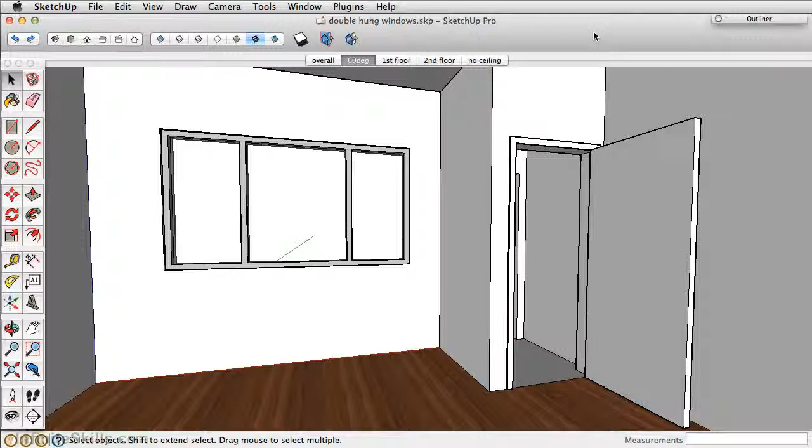Okay, let's create another window type, and that's a double hung window. Let's orbit outside and take a look at the top two windows in the master bedroom.

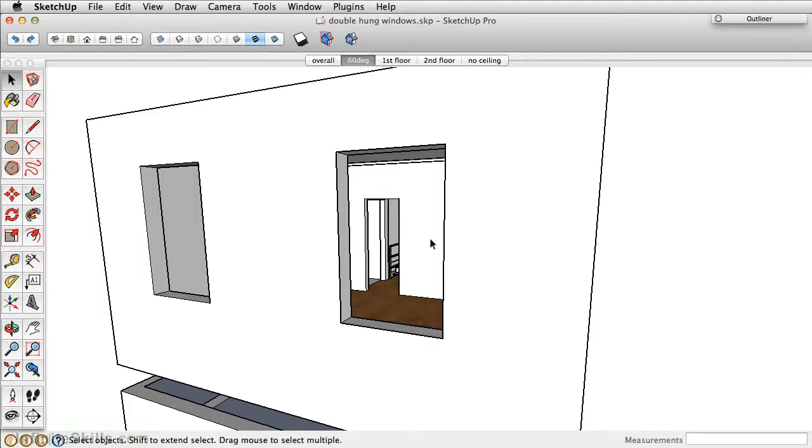To create the double hung window, we're going to draw a rectangle and then separate the rectangle in two, and then push pull the elements to create the two parts of the window that would essentially slide up and down.

Go ahead and take the rectangle tool, draw a rectangle over the front face here, and like previous ones, double click, then right click and make it a group. Let's go ahead and double click inside our group.

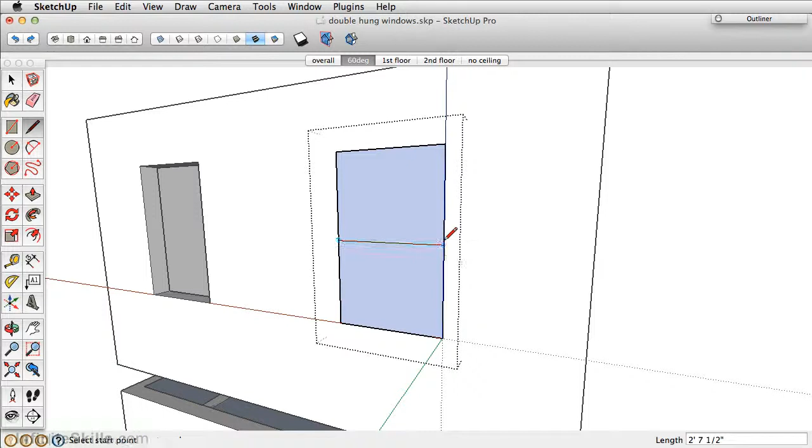Take the line tool and draw a line to break this into two separate faces. Next, offset 2 inches and double click to offset the other element 2 inches. Now before you extrude, we want to separate these into two separate pieces.

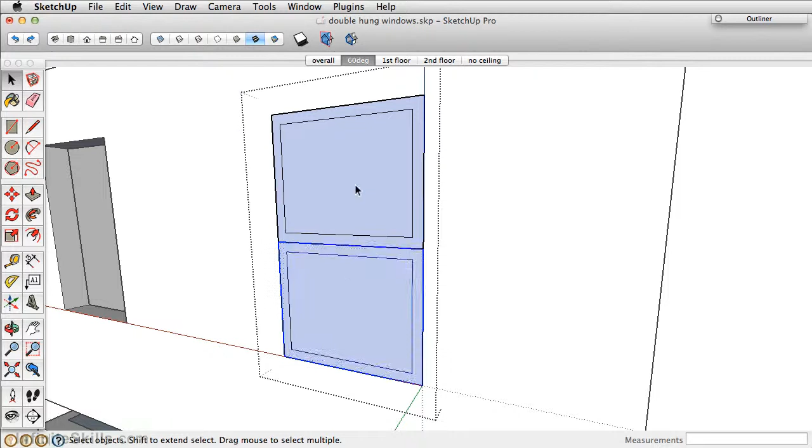So take the select tool, select the top element or the top window and group it, and then do the same with the bottom. Now take the select tool, double click inside the top one, and push pull this out 2 inches, and push pull the bottom one out 2 inches as well. Take the select tool just to click outside of that.

We now want to move the bottom window in front of the top window. Select both of them and move them inside the room. So we need to move this in the green axis.

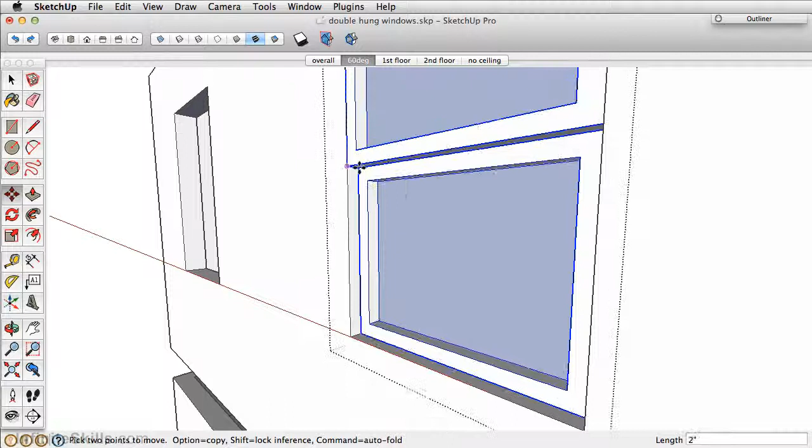So orbit inside. You can move this in a little bit further and move it in 1 more inch, that way it's an inch on this side. And it looks like it's 3 inches on that side, and an inch on the top here.

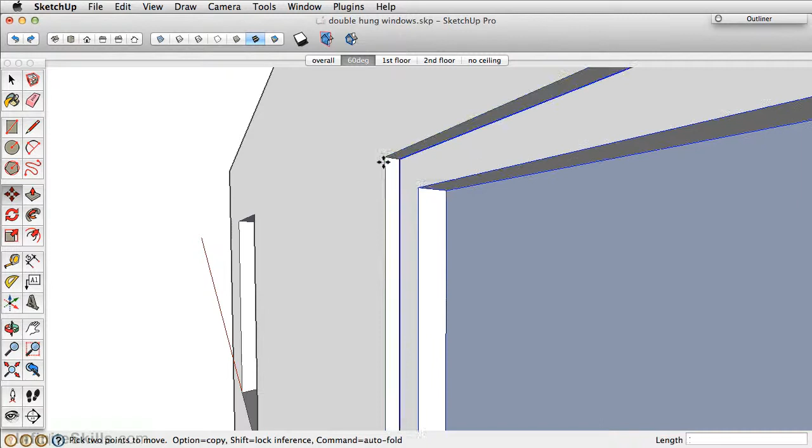All right, the next thing that we can do, double click inside our group. And let's push pull this face back, not all the way to 2 inches. We just want to push this back 1 inch, and the same for the top.

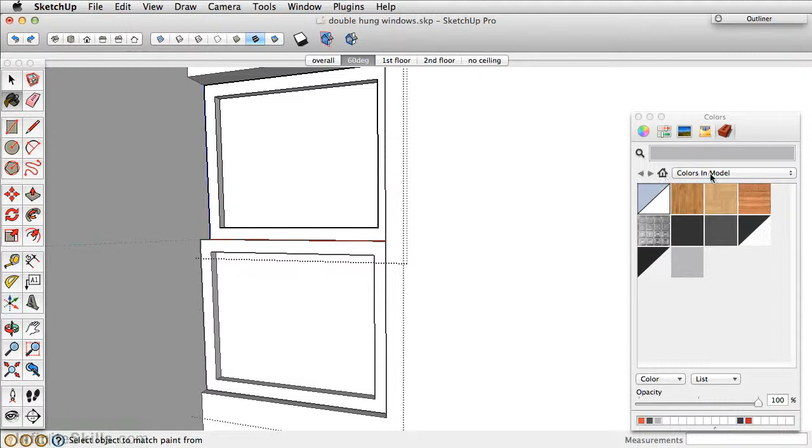Take the paint bucket, click on the brick or the materials in the model, and we want to select the translucent one that we used downstairs and apply it on both faces here. Also take the silver and apply it to both elements there as well.

Now, since this window is the same as this window, we want to right click and make this a component. And then we want to move copy it.

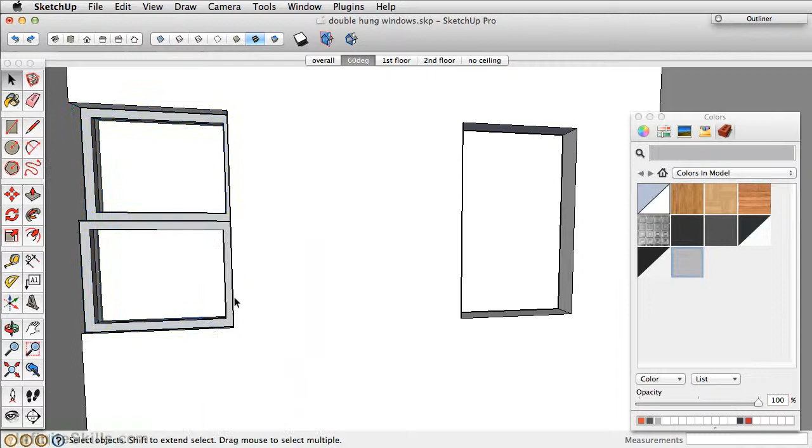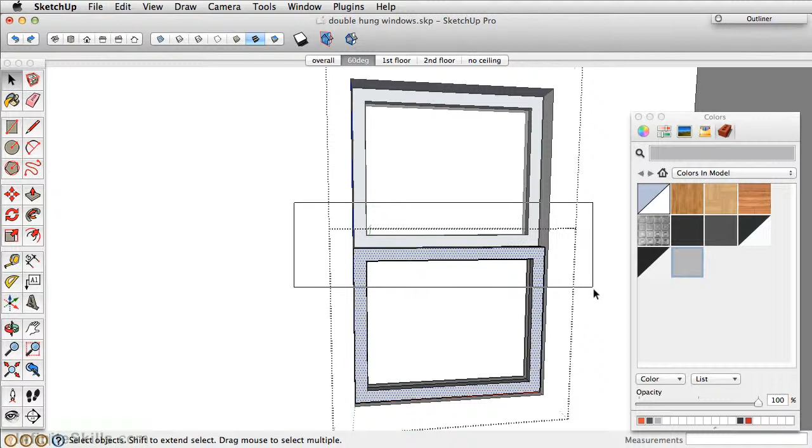The last thing that we notice is that the top face here should actually be up further. So double click again to enter this face. Select a selecting window from left to right around that top area, and that way it only selects the elements in that top area there. Take the move tool and just move this up, making sure you're in the blue axes.

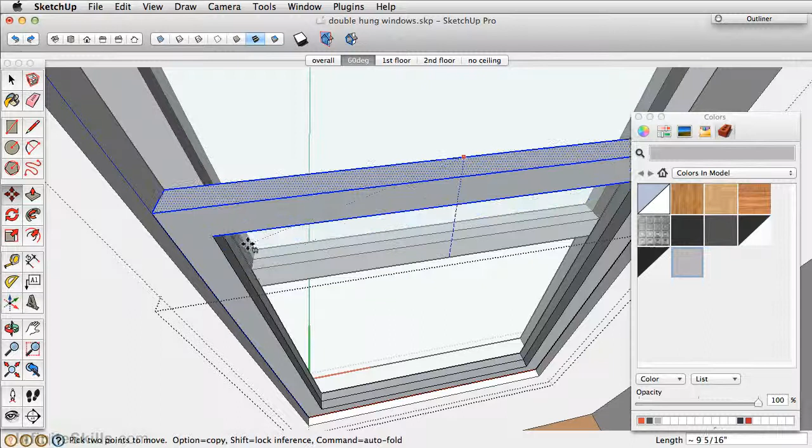Can't find the blue axes? Remember, you can press the up arrow key to lock in the blue axes. And we just want to infer it to the top point right there. If you're having a hard time finding that point, you can always click on the X-ray mode, and that'll allow you to see through the model.

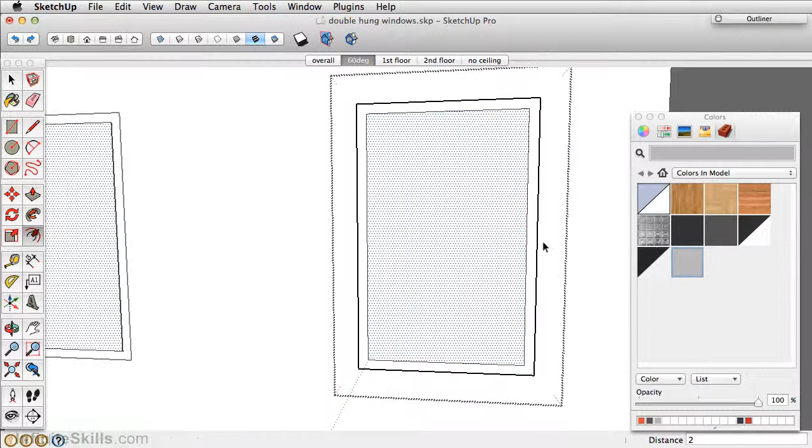If you want to add trim, you can actually draw a rectangle around that front face. Offset this 2 inches and just delete the front face and push pull your front out 1/2 inch. So now you have the trim and the window. I can click out.

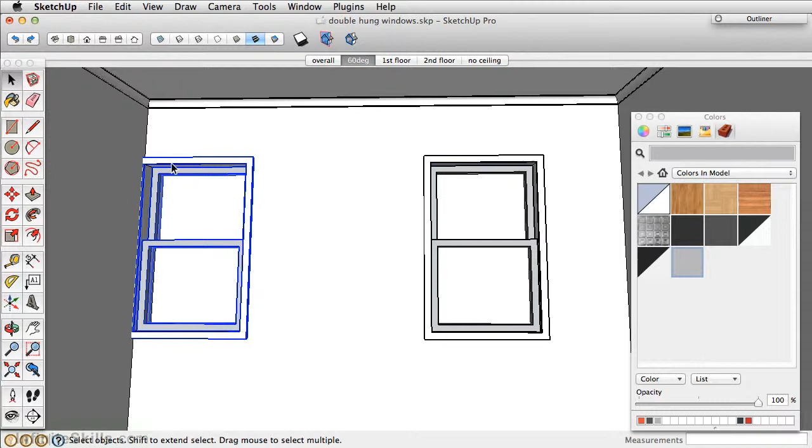In this case now, this window actually ends right up against the wall here. So we can make this unique by right clicking. Hide rest of the model, or find our lines where to draw these.

And then simply just take the push pull. This is actually a good error. Whenever you're nesting groups, make sure when you're drawing that geometry that you're drawing it inside the actual group. So see how I drew this on the outside? When I go to push pull, I can't, because you can't push pull the outside of a group.

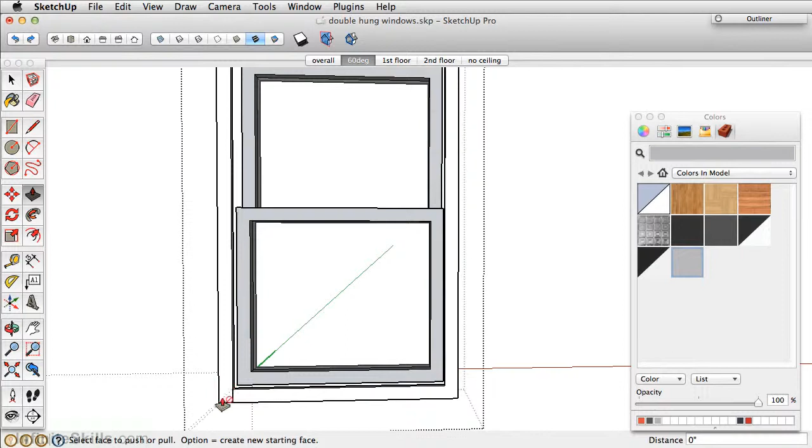So delete those two lines, and make sure you're inside the trim here. Now you can go ahead and draw your line, and draw your line. Sometimes it's nice to make mistakes. You can learn from them.

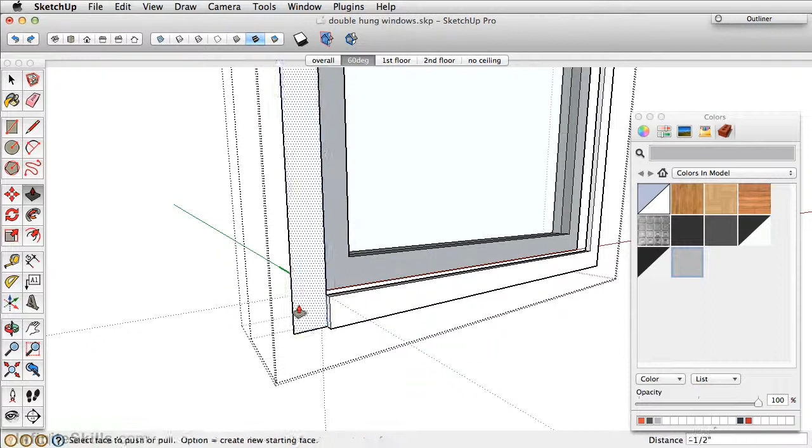And then just erase those edges. Erase this edge here, and erase that edge there.

So that's the basics of creating windows. Next, I'm going to show you a plugin for SketchUp called 1001 Bit Tools, and allow us to quickly auto-generate windows and doors and some other elements based off of values that we input into the model.